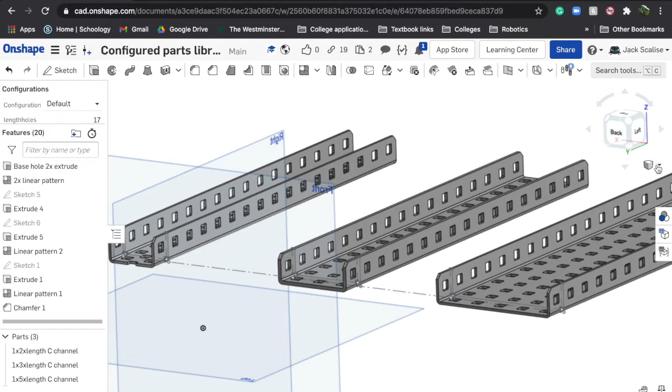This is the second video in which we will detail how to use VEX in Onshape. So if you haven't watched the first one, I recommend it, and it may help you a little in this video. So the configured parts library basically takes advantage of configurations in Onshape, hence the name, in which you can pretty much define a single parameter, which when importing the part into an assembly, you can select and change. You could have multiple parameters, however for this case, really all we needed to change was the length and number of holes of each piece of metal.

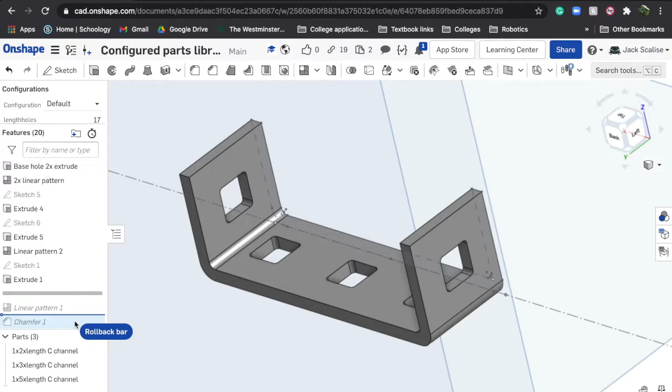Using the C channel as an example, keep your eyes on the middle one because it's about to get a whole lot shorter. That's right, this is just the single base building block in which I did a linear pattern to build everything off of. We can talk more about the exact process behind it, and the full bar will regenerate now. But basically, by changing a single value, length holes, in that linear pattern, the entire part will change.

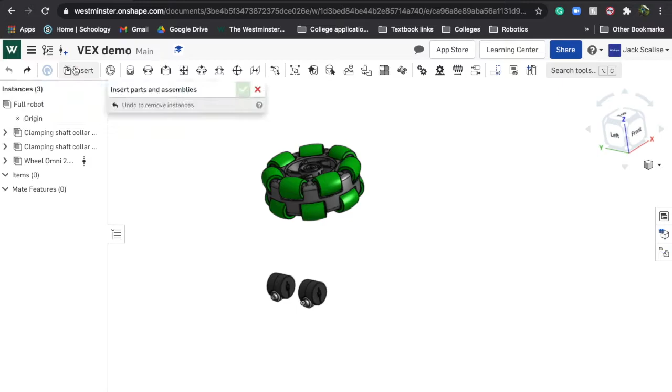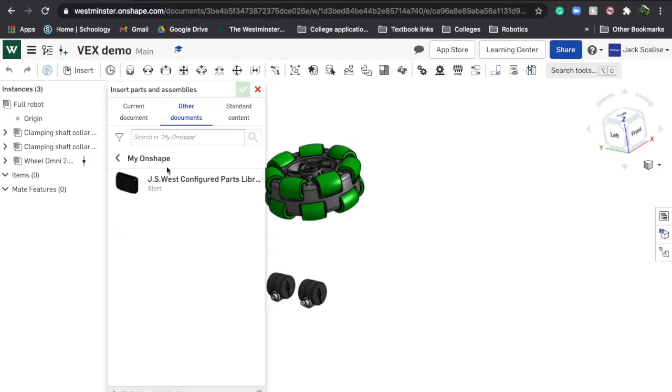So, going back into the demo doc from last time, here's our Omni wheel and clamping shaft collars. Let's go to the insert feature, and this is also stuff from last video. We're going to go to other documents, and because this one's already in my Onshape, it should be shared with you guys, and if it is not, please just come talk to us. Worst case scenario, this one I made on my home account is public. That's the title if you're looking to search it. Alright, now I'm going to go to this one, because it just happens to be the Westminster Parts Library.

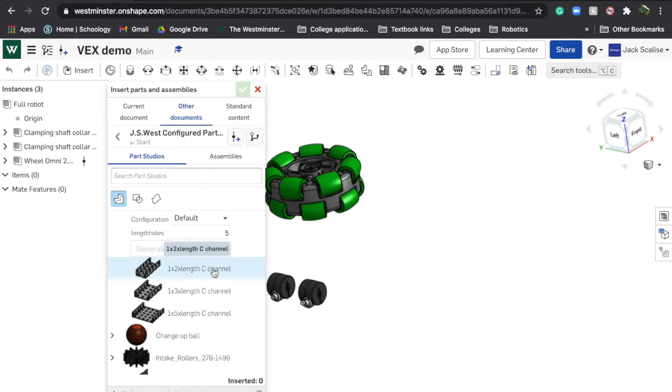In the Part Studio, navigate to C channel because I'm in the mood for some C channel today. And now we literally just change the hole length, this parameter right here. I'm in the mood for a 5 length hole. Hit return, click generate, and then you'll see they populated. I'm thinking a 1x2x5 would be pretty good. And so it will load in. Cool. There we go. Click, drag, drop, and you're done.

Let's explore some other things in this parts library, even if you may not use them as much. We do have a basic L channel with the same configuration setup. There's some electronic stuff that is pre-grouped for you guys, along with the V5 Cortex mounts, long and short. I do not believe they were in Automatas, hence why I added them. Same goes for the battery clip. This is just a rough change-up ball. It's just a sphere, so I recommend CADing that yourself as practice. And one of the other things you may need to use.

When you think of metal, you probably think of C channels and possibly L channels or rails. Side note, rails are not included in this configured parts library. Those are good practice on your own. And also, I've noticed that the little extra tabs on the end of rails are so infrequently used by y'all that it may not be worth having in CAD. If it's a truly special part, good practice to CAD on your own. Alright, back to what I was saying.

The one other configurable parameter that you will most likely be taking advantage of is axles. These don't look a lot like axles, but they are. Low strength and high strength axles are just two axles of different diameters. Feel free to ask us more or just look on VEX's website to learn about the different use cases. In general, you'll probably be using low strength unless you're working on high stress joints like arms, hence the name, high strength axle. So let's import a low strength axle.

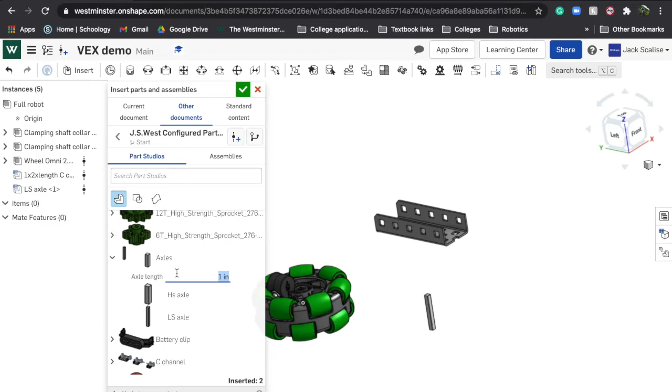And we'll see all of a sudden that it is really, unfortunately, short. So you can just change the axle length. This can go to decimals, so let's make maybe a common length of like 4.5 inches. That one's pretty useful for a lot of things. We'll import it again, and you can see it's a lot longer.

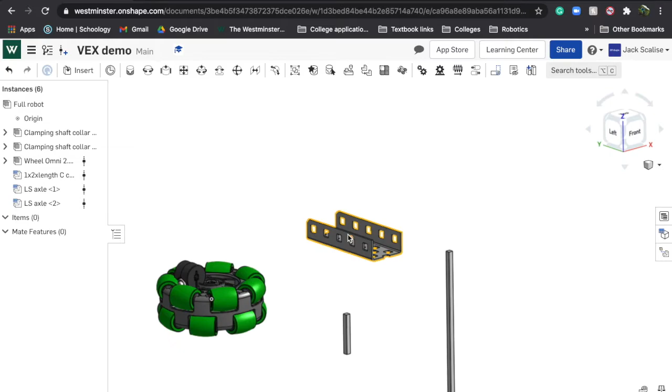Now, one last thing. I've closed the importing window, but say I want to change my axle or metal length. Let's change metal since that visibly is a little more complex and probably interesting to you guys. Let's just do right click, and somewhere in this massive list you will see change configuration. Click it, and then in a second you'll see that we can change the length holes. It looks like the importation screen again, but it's not. Maybe we make it 8 now. Generate. And this thing will update.

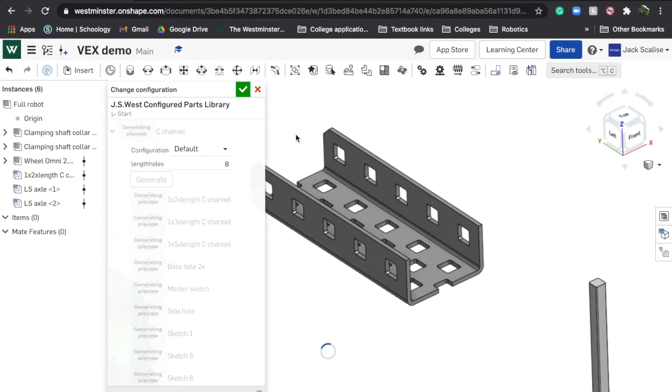Do be careful because sometimes changing the length of a critical piece of metal midway through designing your robot can kind of mess stuff up. However, using the offset feature of fasten mates should get you through. If you don't know what the offset feature of fasten mates is, Onshape has some great videos detailing it, and I'm also more than happy to talk about it as well.